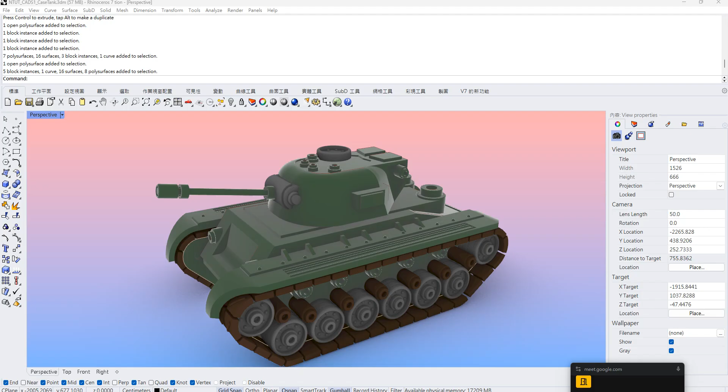Alright, so let's get started with the tutorial for today. Last week I hope you guys have already finished this part - the tab of the tank, and also the armor on the top. This part is basically nothing special, just follow what we've done before. We have already finished the shell, the armor, and then put the wheels on. Then you're done.

So today it's going to be a little bit intense. We are going to finish the cannon. I will probably simplify a bit about the cannon part, and we also have to finish the body of the tank right here.

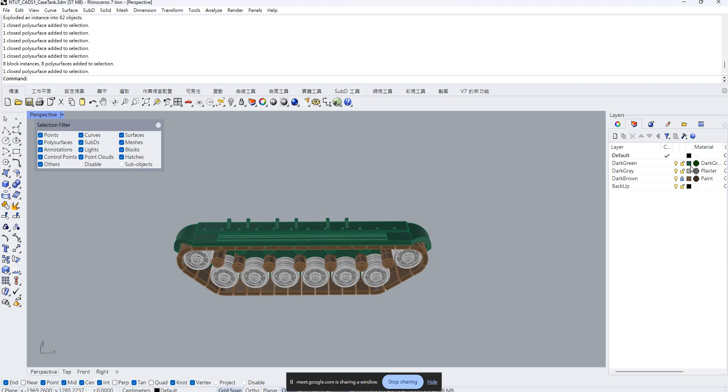Press Ctrl and G, or go to Edit to do the group. And for sure, again, we are going to make this one become a block. So type in B-L-O-C-K, block. Make this one become another block inside your model. So we can totally call this one ARM and tab. Okay, so here it is.

So the advantage of making this one is that once we change anything right here, the other side, the left side, will be changed as well. So if you are going to change the detail of your model in the following operation, it will be easier. You don't have to copy and mirror it again. All right, so that's the things.

Now let's take a look at the body of the tank. The body of the tank actually is pretty simple. Let's take a look.

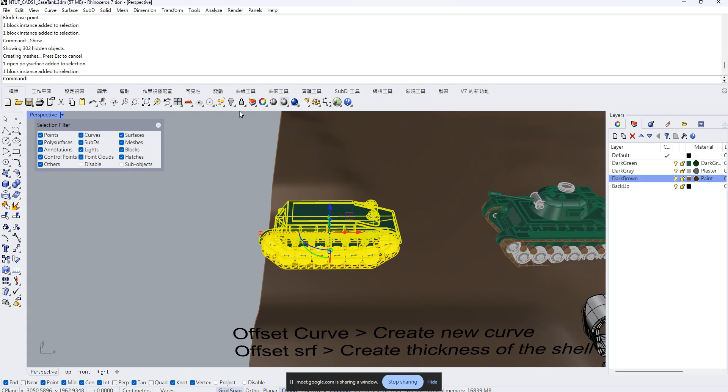As far as you can see, although it's not a regular primitive geometry, you can see that all these things are just like, I would say, very sharp and very regular geometry. There's no smooth corner or complicated geometry right here. Basically, for this one, it's just like regular simple geometry.

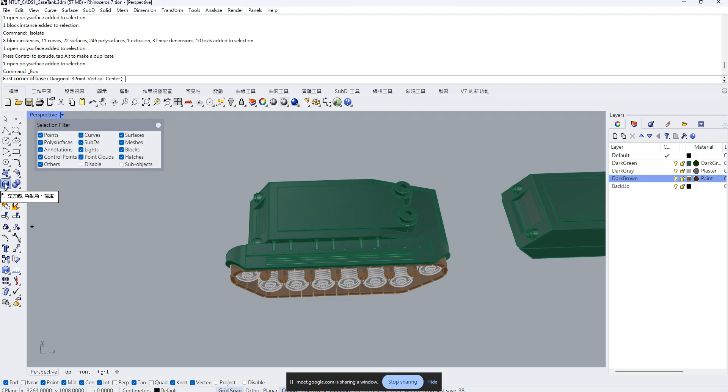So actually, we can start with a single cube. So that's using this one, the box. Just randomly draw, and you can assign the size of the body.

So probably for me, I will type in 600. Oh, 600 is too much. I type in 400. Okay. And for the width, I will type in probably 200. And for the height, I will set this one as 90. So this is the basic size for the tank.

And for sure, if you cannot follow the units or the number, the size of the tank just like mine, it is okay. Just draw a box.

So how can we make this one become something like this? First, we can just hold on your Shift and Control key and do the detail operation, move the edge of the model. That's the first one, we can do this.

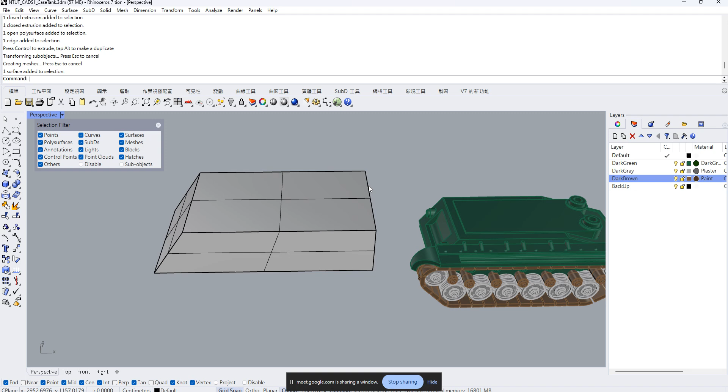So for example, let's drag and make this model look like that. So this is the first way, we can use this way to do the operation. But for this time, I won't do that. I will use another way to do that.

So let's go to the side view right here. So how can we make this one become something like this? For this time, I would like to use the trim command. So we can use polyline, we can draw a couple of polylines.

This one will be the first line, this one will be the second line. For this part, you don't need to assign a specific size or unit because after all, it's just about the form of the tank. So you can define it by yourself. And right here, I will do the same, just draw a line, and for this one as well.

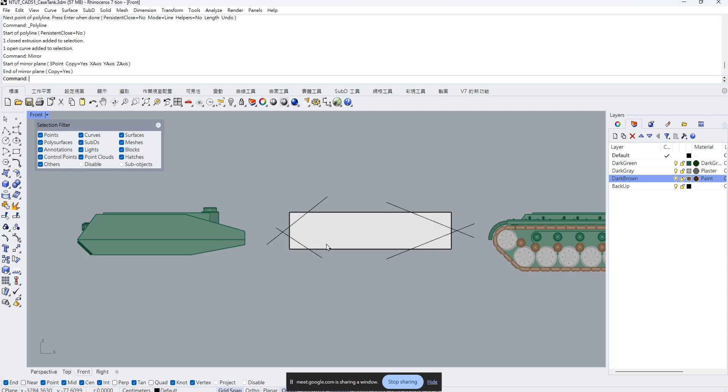Probably for that one, I will use mirror, because I want the upside and the bottom side to be the same. All right, so now we have that. I will move this one down.

So now we have already drawn the lines. Basically, the line is just like the guiding line right here. So how can we use this line and make this box become the form like this? Just use the trim and choose the line first. Basically, the line right here will be just like the knife for cutting your geometry. Then you can start to cut. Sorry, let's do that again.

Trim is right here. Using trim, choose the line first, press enter. Then you can start to cut. Let's just cut off the useless part.

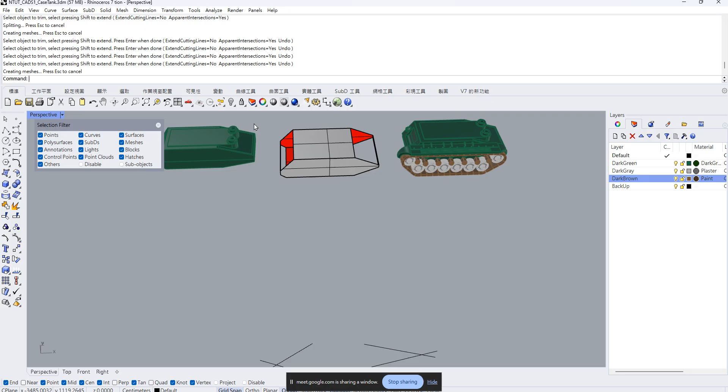Now let's go back to the perspective. You can see that this one becomes empty, but I don't want this one to be empty. So there's a command we can use. Wait a second, let me write down the note for you. So how can we make this one not an empty surface?

First, we can simply use loft. Second, we can use cap - not with E, just cap - which will be faster. Let's choose this one because right now all the open surfaces, all the open holes, are planar surfaces. So you can just select this model and type cap, C-A-P, on your command bar.

Once you do that, it will automatically fill the empty area. If you want to do it manually, you can use loft, L-O-F-T, choosing two different lines and fixing that. You have to align the curve and make sure it's on the right side. After that, you can Control J to join it. Both methods work, but cap will definitely be faster.

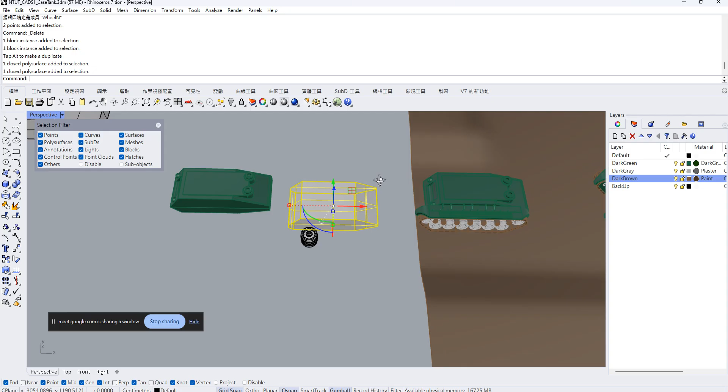For example, with this model I want to create a kind of base for the cannon. How can we do that? Actually very simple - let's just create another cube on top of the model. I'll click the box tool and just draw a box right here.

You can scroll down, and the size of the box doesn't matter - you can adjust that later. I'll draw a box like this and make sure to put it on the center of the mesh. Move this up a little bit, maybe around 5 centimeters. Now how about the border?

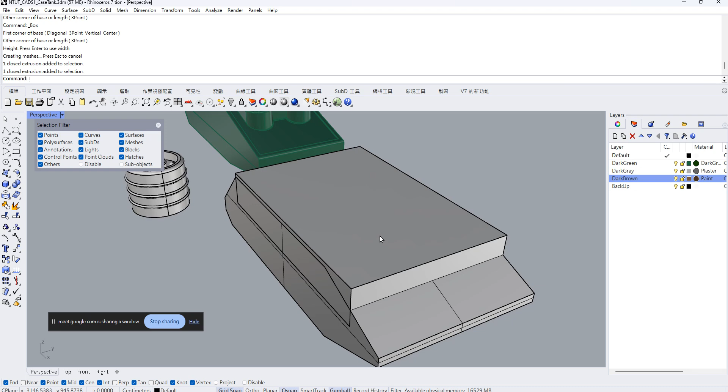For the border, I want there to be a gap on the side. I'll click this one and move it in, maybe 15, and this one negative 15, and so on. Now we have these bases - the base for this part.

Now how about this? Basically, when I'm working on this kind of stuff, in order to save time and speed up the whole process, I prefer using a model we already have and modifying it into the tank detail. We already have the wheels, so I'll explode this one and extract it - I want to use the center of the wheel to create the detail right here.

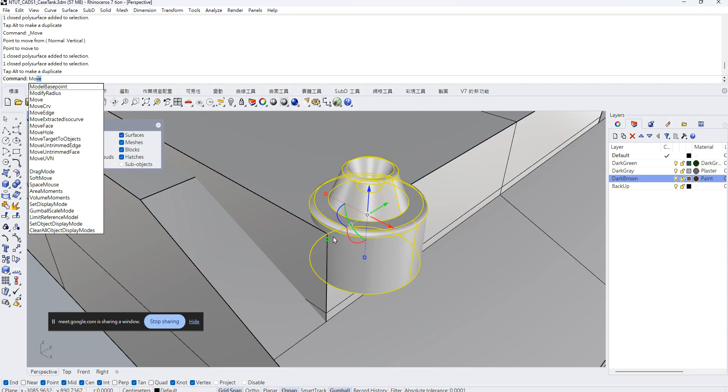Let's move this one to this side, using transform, move, and move this to the spot. In order to make sure this can perfectly fit your model, you can just use the move tool to position it to this side, and it will drop down.

Obviously the size isn't perfect, so we can drag this down and move it up a little bit. Now we have it. And if you think this is too small and want it bigger, let's just scale up this one and put it to the right side.

Okay, so that's it. That's all about how to make the detail of the tank.

For this part, I also want to have some gap, so I will move that again, probably 15 or so. So how can we make all these things become one object?

If you remember, I have to make this one become a solid object first. All right, so first let's mirror this one because it's going to be a symmetry model. So how can we make this an integrated model, one single model?

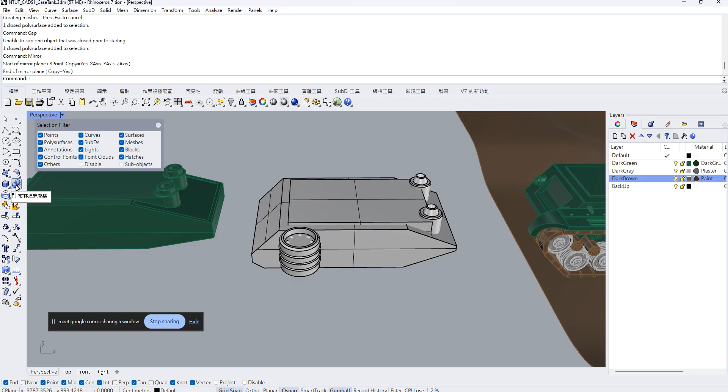Just like before, let's use Boolean union. Let's select all of them, choose Boolean union, and all these things will become one. You can see the wireframe, the ISO curve has changed, and the detail has been added.

So that's it. For the front part and for the head, like the headlight of the car, we can use the same method. So I will copy another wheel here.

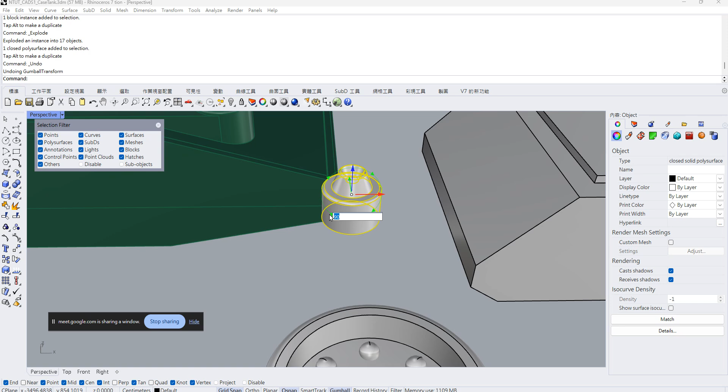Explode it, because I only need the center part. Rotate this one 90 degrees, and make this one longer. Pull this model to here.

And again, mirror it. Choose everything, Boolean unions, all right.

So that's it. That's about making the detail on the car, on the tank body. I will stop right here.

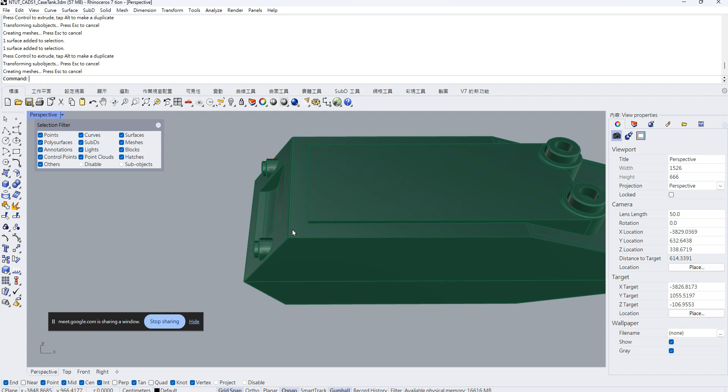So for the tank's body, it's pretty much done, but there's still some detail we can keep improving. For example, the shallow part on the front side, or maybe we can add some detail on the back side to make sure it looks detailed enough. So how can we make this one, how can we make this part?

Actually very simple. When working on this kind of form manipulation, the first thing we can do for sure is use the selection filter to add the sub-object under the model.

That's the first one, so you can select the curve, vertex, and change the shape right here. That's the first thing we can do.

And second, for sure, we can use the object, the model, or the curve to do cutting, trimming, splitting, etc. Right now we're going to use a box to cut off from the model. So let's choose the box right here.

Draw a box. Let's assume this one. Okay, make this one smaller.

So let's choose in the model. Hold on your shift key, scale down this one to probably 0.8 or even smaller. All right.

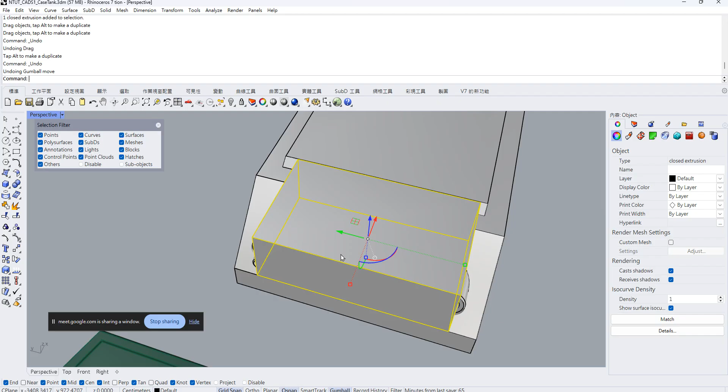Oh sorry, let's do it again. All right, so make this one smaller, make sure it won't intersect with our headlight. Put this one here. So basically make sure all these models have been completely intersected with each other.

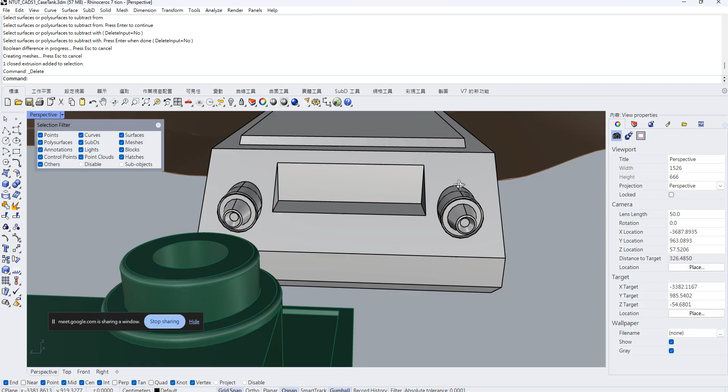Next, the thing we can do is use Boolean difference. Choose the model, press enter. Choose the box, second. Now you can see it successfully helped us create a shallow part on the body of the tank.

So for sure, you still can do manipulation on this one. You can change it and also edit the curve yourself, but you can see right here it's a curve, actually a surface.

So how can we do that? Very simple actually, let's use fillet right here. Click fillet, choose surface one, choose surface two, and you get that. Let's just enlarge the size.

Probably I'll make this one become, wait a second, let's do that again. Okay, let's do that again.

So let's use Boolean difference. Choose the model first, choose the box second. So it will help us cut out the front of the model.

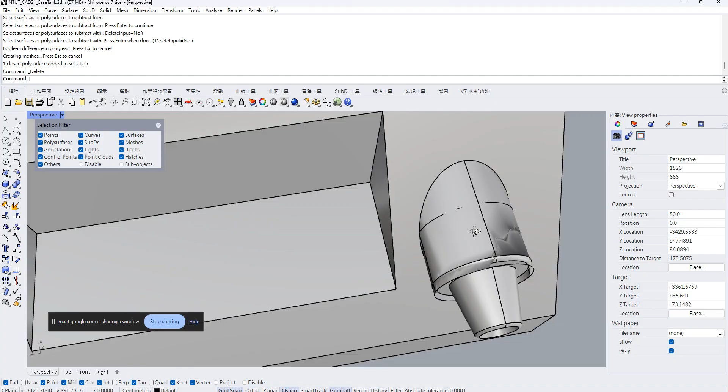You can see right here there's something weird, a color shows up. Usually these kinds of things happen because of a number error. We can fix that later, but anyway let's keep moving forward.

Let's use fillet, choose this one. I want to make this one become probably 30. And choose surface one, surface two, and we can get that one. Right, so now we have it.

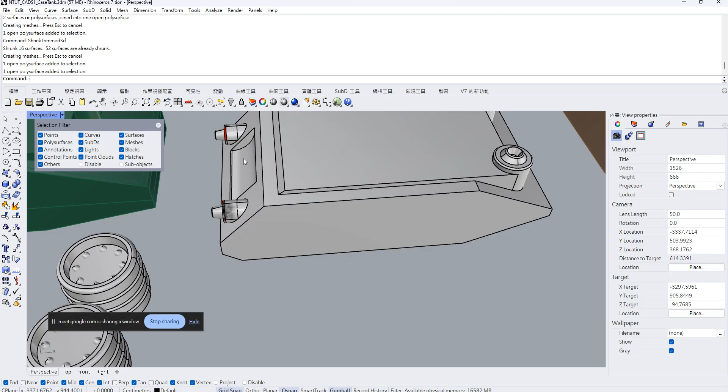So that's it, that's about how to make the detail. Once we finish this part, the front side detail, then we can start to make the tape combine with our body.

Let's move the tape to here. If you want to make sure these two things can be perfectly assembled, usually I prefer you guys using this command to help you measure the size of the model so that you can have a reference point and use that to combine with the target model. So let's take a look.

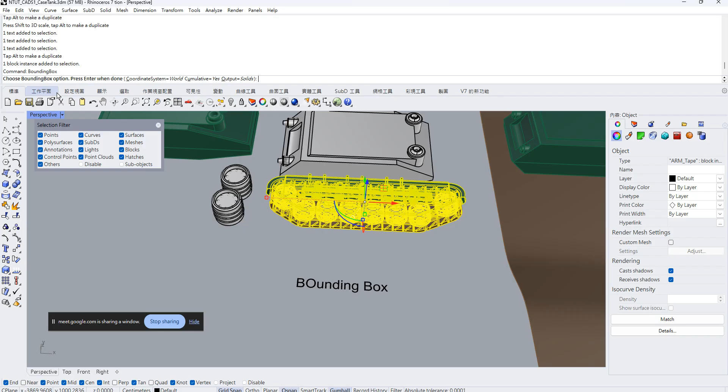So how can we have a reference point and also a reference size of the target model? I will use this one, bounding box. This is the command for measuring the size of the model. Let's click this one and type in bounding box. If you type the first three characters, the rest will show up.

Let's just click enter and it will help you create a box outside of your model, so that we can use this as a reference using the move tool. Move this one to the side, and also select your model as well. Move the model to here. Now they perfectly attach, but I have to insert them a little bit more, probably to here. For this part, it doesn't have to be very precise, let's just put them on the side approximately.

And the other side, let's just use mirror. Go to transform, using mirror, and mirror it to the other side. So basically, the body of the tank has pretty much been done.

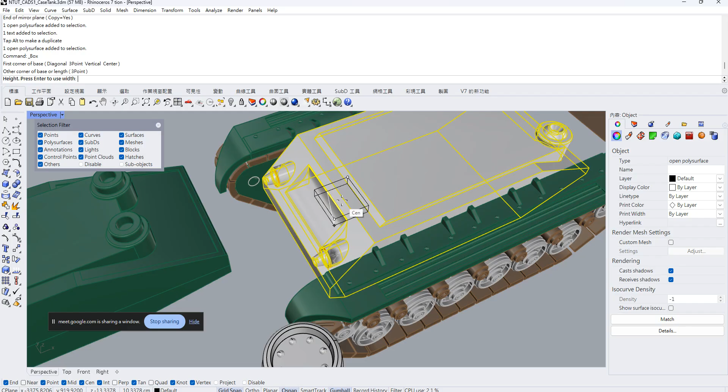Okay, so that's it. Let me repeat the operation. First thing, using the box to cut out from the model. Let's do it again, probably we can do the same thing on the back side. Box. Move them to here, move this one down. Scale down.

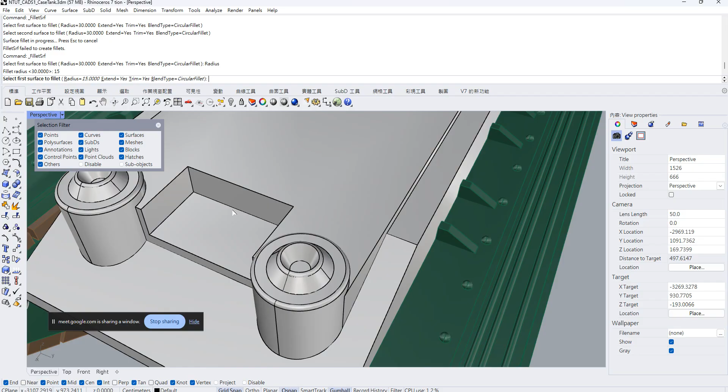And using Boolean difference, model first, box second, so now we cut out from the model. And then how about making this one become a surface? Very simple, using fillet, choosing the first surface, second surface. If this one is too large, we have to reduce the number of the radius. Okay, so now we have it. Once you finish, don't forget to join them.

So for the rest of the part, just move them to here, move the tape to here, assemble them together. That's the whole thing about the tank's body and also the tape. I will stop right here and give you some time to do it.

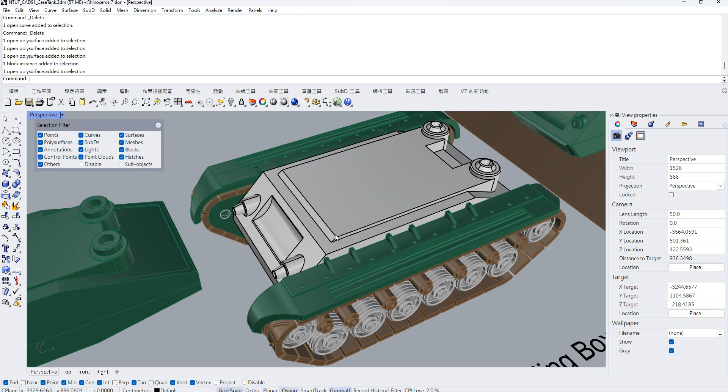So how can we assign color and texture on this model? Okay, how can we do that? Please take a look, inside Rhino, the way to assign color and material is to use layer to do that. So if you want to make this one become the green color, you have to put this model into a green layer. That's the idea.

Is there any questions on the back side of the classroom? No? Alright, let's keep moving forward.

So anyway, let's take a look. Let's go to the sidebar right here, the right sidebar. Let's choose layer, create a new layer. Let's call this one probably the armor. And how can we make this layer become the green color?

Very simple, there are two options we can do. First is this cube, this box is the color for the shading mode. So if we change the color right here, let's change this one to green. I'll do this one as well. Click OK, just using the color wheel to change the color. Click OK, so this layer will become green color.

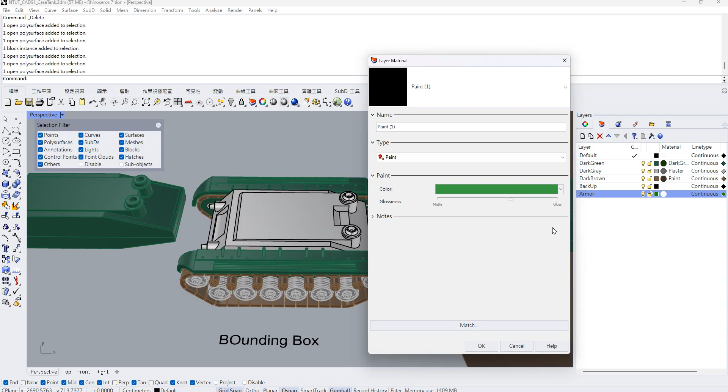For example, I want to use a paint color, coating color. You can choose the color right here. Maybe a deep darker green, click OK. The glossiness means the smoothness and the level of the polishing surface. If you don't want this to be super bright, you can reduce this number. Let's click OK.

So how can we make this model get assigned the color? We choose the model first, go to the layer, right click, change object layer. Now it will have that color.

This is just for shading mode. If you go to render mode, you can see the color has been changed as well. If you change this model to a different layer, the color will change as well. That's how we change the layer and change the color.

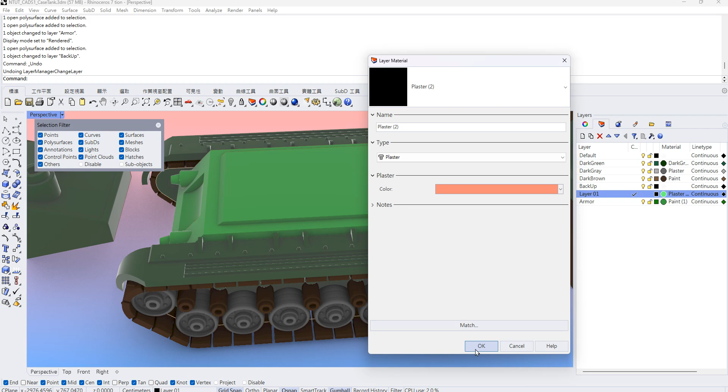Let's repeat: create a new layer, and change the color on the shading mode, change the color on the material. Maybe let's change this one to red so you can see more clearly. Click OK. Select the model, right click, change object layer. Now you can get that.

So that's it. The things I'm asking you to do: give me a model and also three screenshots. Please remember this command. I don't want you using the default screenshot, I want you using the command inside Rhinoceros.

Please use the inner command of Rhinoceros to do the screenshot. There is a command named capture to file. Let's assume this is the viewport you want to capture, this is the view you want to capture. Let's type in capture to file, view capture to file, this one.

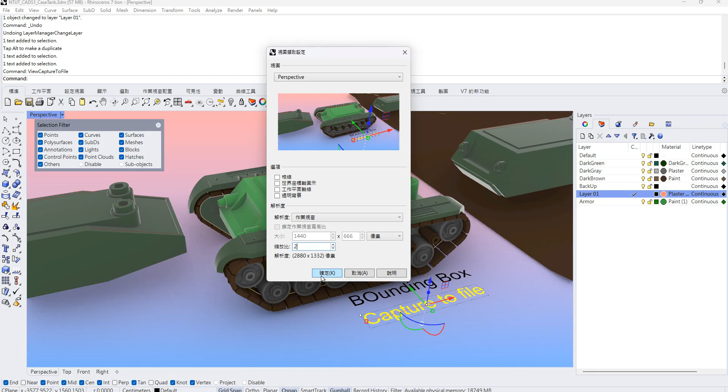It will show up this window, and you can set up the size of the resolution. If you're choosing 3 times bigger, it will create 3 times bigger size image than your screen. So usually I will set this as 2, it will be quite enough. Let's choose yes, and it will show this window where you can save your file.

Let's take a look. This is the screenshot you will get. The resolution will be higher and also very, very fast. Just remember this command, capture to file, use this way to capture the screenshot. Don't use print screen, because with print screen the resolution will be super low.

Here is about the setting of the texture. Just remember: create new layer, go to the sphere and also the box to change the color and the texture setting. Finally, choose the model, right click, change object layer, 改变物件图层, so you can move your model to the target layer and change the color as well. That's it, that's the last thing I have to teach you before we move into the rest.

All right, let's keep moving forward. In the last class, we already finished the body of the tank. So now the next thing we are going to do, wait a second, let me confirm I've shared the screen. Okay, the next thing we're going to do will be about the cannon.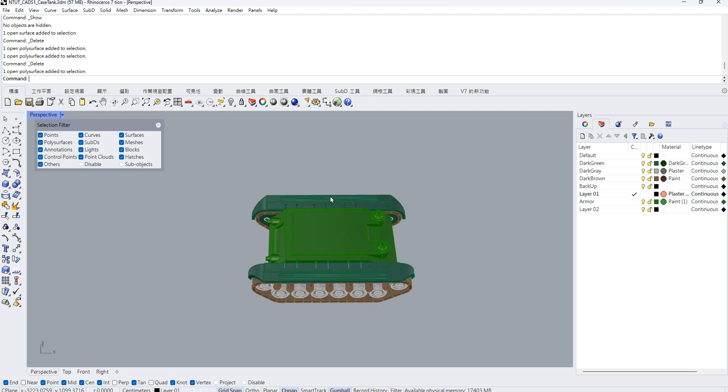The canal, I think this part will be very, very important in this class. Because if you want to become a product designer, or make a model for a car, vehicle, airplane, etc., you can follow this idea to do the model. So anyway, let's get started.

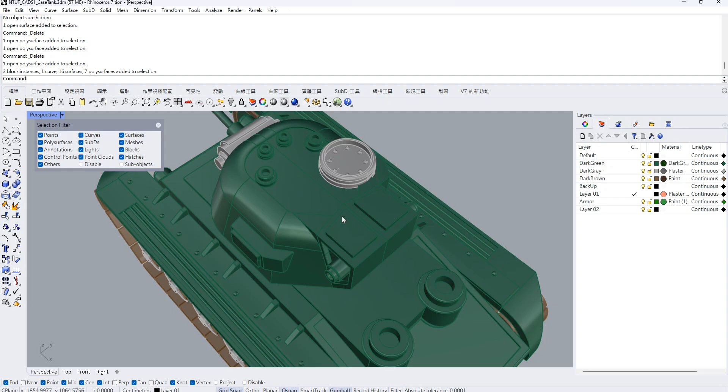Basically, when working on this kind of symmetry model, I suggest you cut the model into half so you only have to do one side. For the other side, just mirror it, it will be fine. For the canal part, although the reference I gave you is not a symmetry one, for the large proportion, they are still symmetry models. So this time, I will just do one side, and for the other side, we can mirror it.

But the hardest part will be here, this smooth transition. That will be a little bit hard at the very beginning, but please just follow my operation and try to do that. All right, anyway, let's get started. So let's copy this one to the side.

So how can we make this canal model? For that one, again, usually I prefer to start with simple primitive geometry.

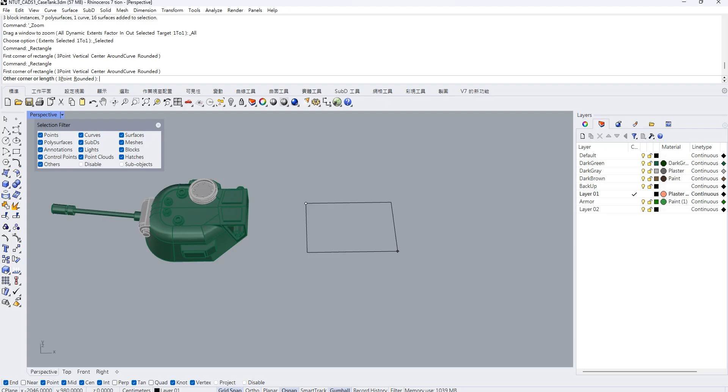So for this one, for example, the body of the canal, I will start with a rectangle. For now, I will do both sides because at the very beginning it will be easier for you guys to understand. So let's choose the rectangle tool and draw a rectangle, probably 120, something like that. So this is the model that I want to have, okay.

So how about the other side? Right now I'm working on the top drawing of the tank. I want to make this one a smooth corner, and this part can be a sharp corner. So how can we do that? We can use the fillet curve right here. We have similar options both in curve and surface. This time I want to use fillet curve.

And for the radius, 30 is fine. Let's choose 30. And for this part, I want this one to be a sharp corner. So let's simply choose chamfer, the second one. Go to the chamfer curve, click the little triangle, and choose the second one. This time again, I want to choose 30 by 30.

So now we have the basic one, the base drawing, the top drawing of the canal. How about the other side? Let's use a polyline to cut this one into half, using this polyline as the middle line, then choose trim to cut off. For the other side, right now we don't have to do that, but if you want to see the whole object, then you just have to mirror it to the other side.

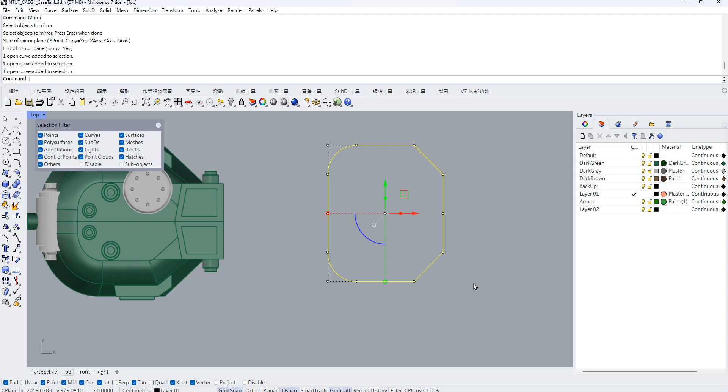Probably we can make this one longer so that the proportion will look better. Maybe just like this. So this is the top drawing for the model, all right? So let's give you some time, probably around 5 to 8 minutes, to finish the top drawing.

Just remember, we are working on the rectangle first, using the fillet curve to make this kind of round corner, then using chamfer to create this kind of sharp corner. Then just mirror it to the other side and you can get the top drawing. Let's give you around 5 minutes to do this operation, then we will keep moving forward.

Alright guys, let's keep moving forward.

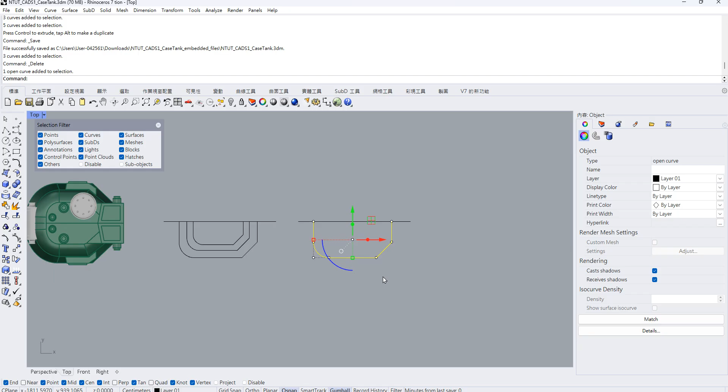So in the last operation, we already finished the top drawing of the tank canal. It looks like this: for the front part, we have a round corner, on the back side we have a sharp corner right here. So the next thing we are going to do is use this curve and gradually construct a 3D model of the canal. So how can we do that?

Basically, for this part, we are going to use the idea of sweep. This time we will use sweep 2. I would say the most important commands inside Rhinoceros are sweep 1 and sweep 2. Once you know these two commands, for most industrial models you are okay with that, whether it's a mouse, a laptop, a car, a vehicle, or even an airplane. If you know these two and can master them, I think most models you can handle. But organic models are still hard to do. For this one though, it is okay for you.

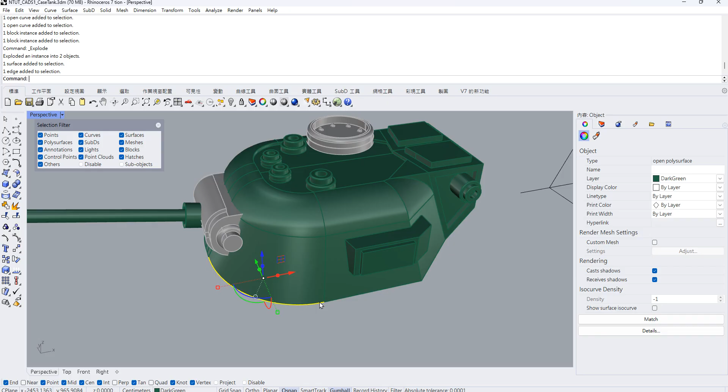All right, let's get started. So basically the idea will be like this. Now we have the bottom line, right? Here is the bottom curve, we have the bottom curve.

So the thing we are going to do is use the section curve, for example like these two. We are going to use the section curve, follow the bottom curve, the base curve, and create a surface for us. So that's what we are going to do. In order to do that, we need at least two rail curves, including the bottom one and also right here. Actually, for this time, I want to have three.

Then we can create a section curve to create the model. So the idea will be like this: here is the base curve, here is another 2 rail curve, and this one will be the section line. Once we set these up, we can ask Rhinoceros to use this section curve and follow the rail curve to create a surface. So that's the thing we're going to do. So how can we do that?

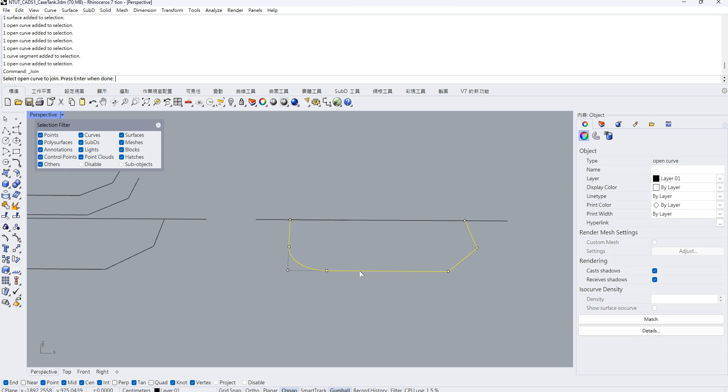First thing is I want to copy this one, here, that's the base curve. Let's just move this one up. Hold on your Alt key and use Gumball to copy. I want to copy this one probably around 40 centimeters high and scale this one down. Hold on your Shift key and you can scale down this one. Let's type in 0.8. Make this one 0.8, size bigger. So now we have the second curve.

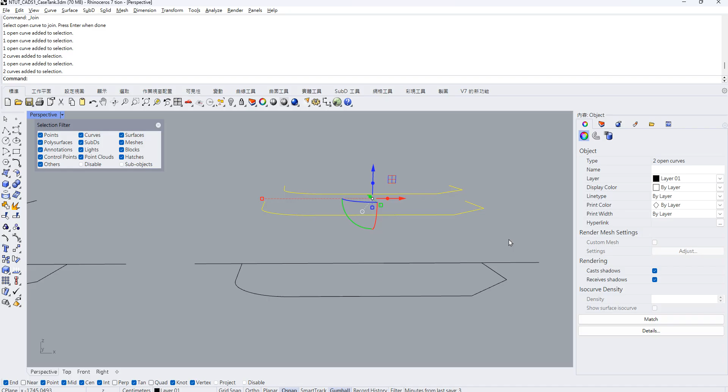How about the last one? I want to move this one up again, probably around 10 centimeters, and scale down this one again 0.8 times bigger. So now I have 3 different curves.

So let's go to the top view. We have to make sure all of them are aligned in the center. So please turn on project mode, this will make it easier to do. Let's move the curve to the center mirror line. Let's use a mirror, move them to the center. Okay, so now we have 3 curves, all aligned about our rail curve.

Let's repeat that again. So basically, first thing, copy this one up, around 40, and scale down, 0.8. And let's do that again: copy for 10 centimeters and scale down again, 0.8. Finally, move all these curves to the center. This time you can turn on the project and move them to the center, just like this.

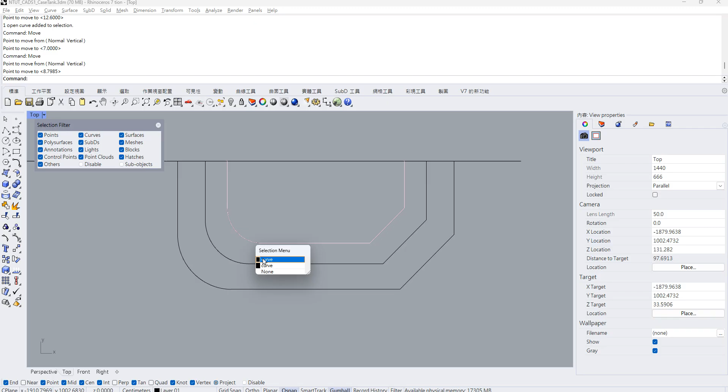Okay, just like this. All right, so now you can turn off the project. Actually, you still can turn on the project, up to you. Right now we still will be using the project. All right, I will stop right here and give you guys around 5 minutes to do this operation.

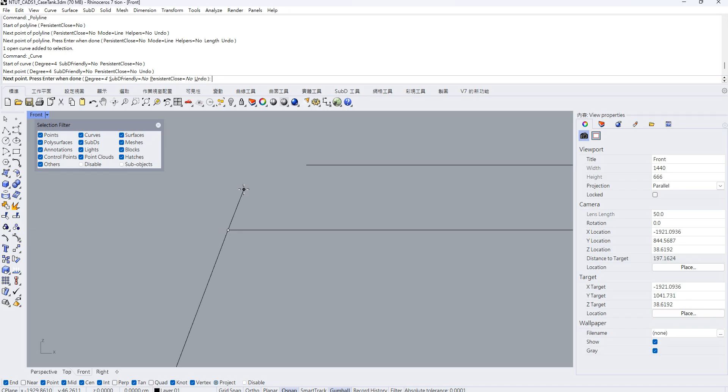We have to go to the side view. All right, let's go to the side view. And for this part, I would suggest you guys turn on the project. And just use the control point curve, this one, the second option here, control point curve, and start to draw, connecting them manually. But for sure, this is not precise at all. But how can we fix that? How can we make this one more precise?

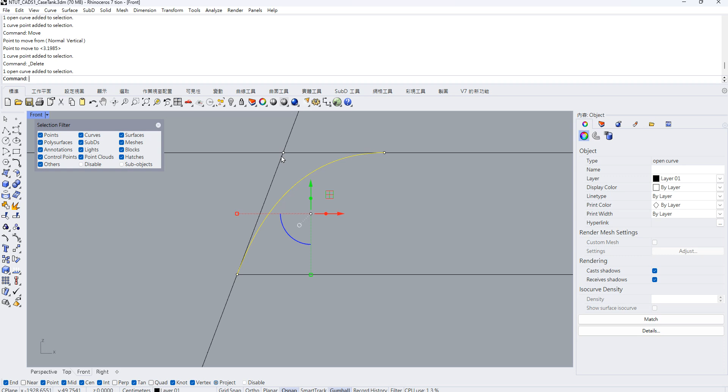Actually, we can try to do this. First thing is, follow the line right here and draw an extension guiding line. And for this one, let's do the same thing. Let's copy one more, type in copy one more, so make sure they can fit with each other. So for the rest of the part, actually we can use the control point, control vertex, to do the operation. Let's just use 3, it will be fine. So make sure the middle control point can perfectly locate it on the intersection point of these 2 extension lines, so that this one will be more precise. Okay, that's the thing.

So first things, let's repeat that again: draw a line between these 2 rails. Second thing, how can we do the curve between these 2? We can use the control point curve to do that. So let's just draw a line right here.

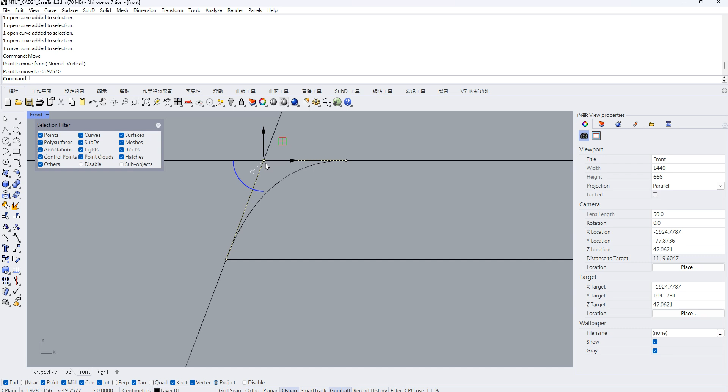In order to make this one perfectly fit with the line we already have, we need to do the extension line from this side and also that side. Finally, make sure these two things let the middle control vertex locate on the intersection point, so we can get what we want.

Okay, so that's it, that's how we can get it. Wait a second, I have to move this one here because right now we're working on the centimeter on the world center. So now that's about the section curve.

All right, let's finish the whole operation, then I'll give you some time to practice. So for the bottom side, very simple, let's just use surface sweep 2 rails.

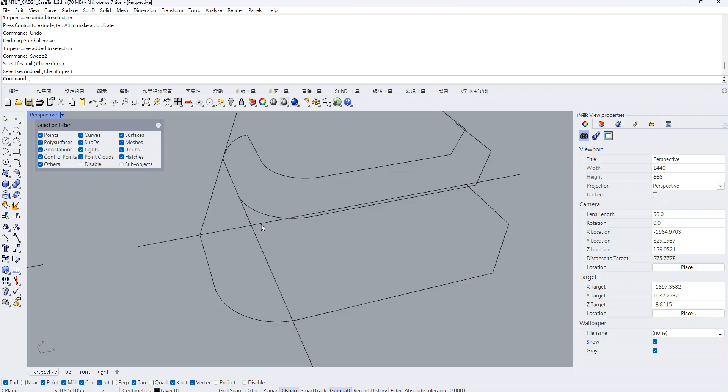Wait a second, I want to delete these now. Let's use sweep 2 rails. Let's go to surface, sweep 2 rails. Choosing curve 1, choosing curve 2, and choosing the section line.

So now we have this. If you don't like this kind of ISO curve, we can do it another way and make this more organized. Let's choose the rail line and explode it. Okay, let's explode it, then let's do that again.

Do the surface section by section. Choosing this, choosing the section rail line, choosing the section line, and this time do the same things.

Okay, so just like that.

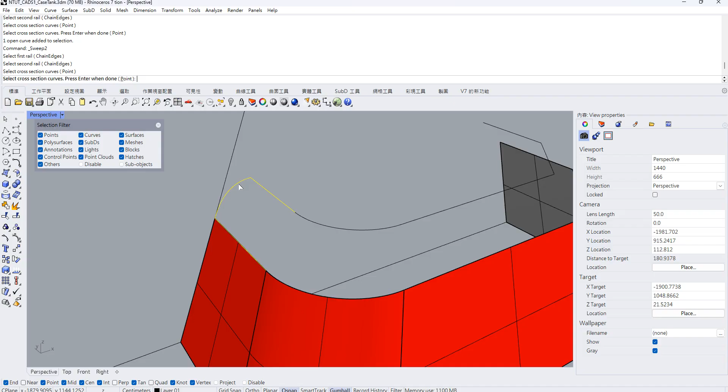And how about the upper part? Since we already have the section curve, it's very simple. Just choose sweep 2, choosing the curve first. I prefer to do that section by section, it will be more clean and more organized.

Okay, so that's it, so now we will have that. But this part looks pretty weird, but it's okay, I think we can still fix that later. But right now, let's just assume this one is finished. Let's give you some time to finish these operations. Alright guys, let's go back to your seats.

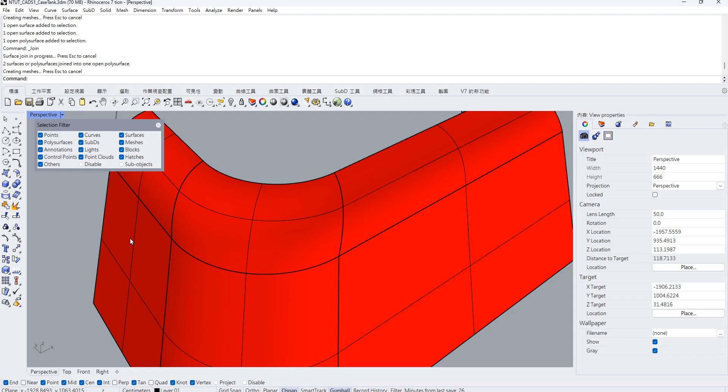Let's keep moving forward. So basically through the Sweep2 and the section line we have, we can create a surface like this. Don't forget to join them together, because before that it's supposed to be separated. So just select all of them, Ctrl and J, join them together. Edit, join. Alright, so you can see this part looks okay, but that part doesn't look right.

That's because for the radius right here, it doesn't follow the proportion to be scaled down. If you want to make sure everything can be super smooth and continuously linked, then we have to make sure the radius of the corner right here, and also here, and here, supposed to be the same.

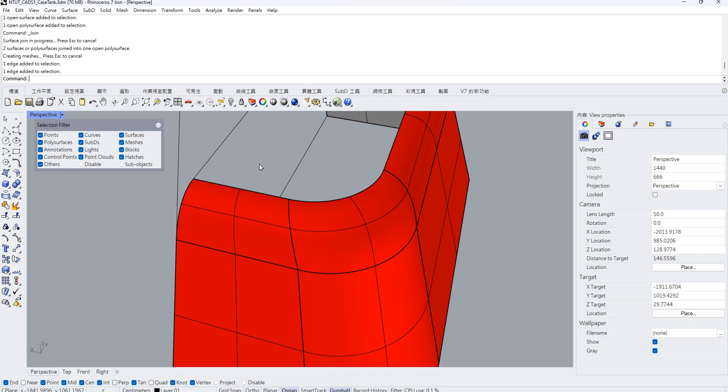So I think that will be a little bit tricky inside Rhino. Unlike Blender, for Blender it doesn't have to be that precise at all. For Rhino, if you want this to be smooth, moldable, and fabricated, it has to be precise. And once you do that, your product and prototype can look nice. But anyway, right now we're just working on the prototype, just working on practice, so it's okay.

All right, anyway, for the rest part, let's try to make this one become a solid model. So how can we fix the face right here? How can we fix the face right here? Wait a second, let me hide the rest of the part. So if you remember, there's a command that can help us fix, to create a planar surface right here.

Usually we use Cap, just like things we used before. But for this command, it only works for that kind of closure surface. So this time, rather than Cap, we are going to use planar surface, something we used before. Let's try using planar surface, type in planar surface on the command bar, and choose the curve right here, make sure it can be a loop and be a closure curve. All right.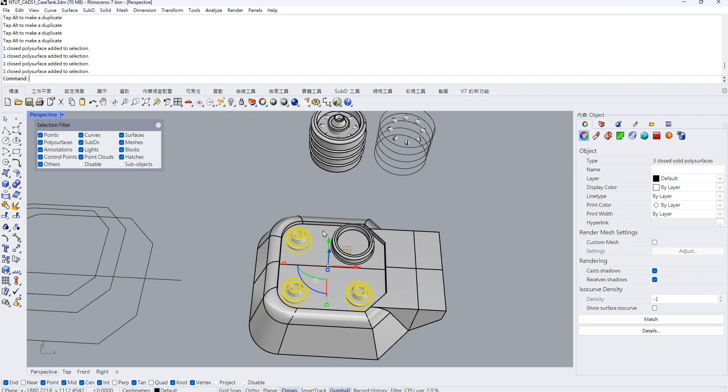All right, so now we have this. Let's join them together. Choose all of them and use Boolean union. So basically the major part of the tank is pretty much done. For the side right here, you can do that by yourself, okay?

Very simple, just create a cube, put it here, and then do some editing, some extrusion. So that's it. And mirror it to the other side.

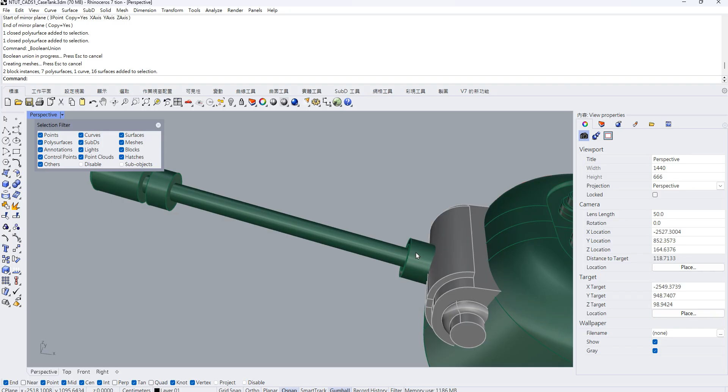Okay, so now we have this. How about the cannon? It looks complicated, right? But actually it's very simple. Let's just use a cylinder to do that.

So let's go here, choosing the second option, cylinder. Click this little triangle, go to choose cylinder. First thing, let's just drag a long cylinder, maybe like this. This is our cannon.

Make this one longer. So how can we create this kind of segment? Very simple. Let's copy—hold your shift key and also the alt key for copy, so that we can create one more segment.

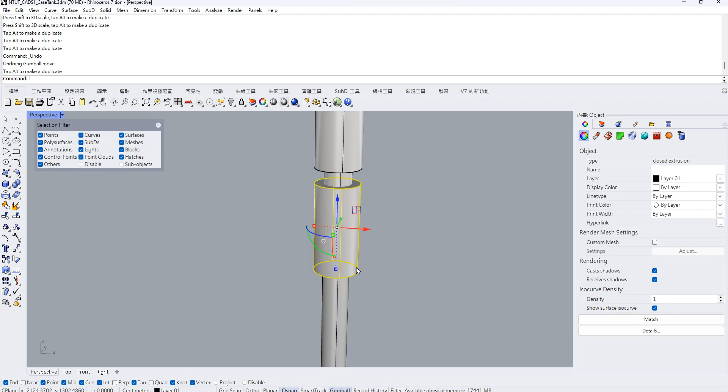And if you want more detail, then let's do this—create one more. Maybe two more. This one can be smaller again. And finally, join all of them together.

And for the join right here, just use the same idea, okay? Probably this one, we can also create one more join. This is for the join part. All right, finally let's use Boolean union to join all of them together. For the join part right here, I mean the intersection, the bridge between the cannon and the cannon base.

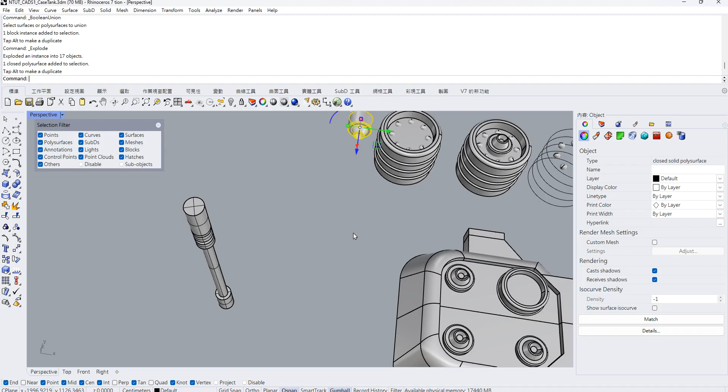That's using the wheel again—explode it, use this one, rotate 90 degrees, 90 degrees again, sorry. Let's go to the top view to make sure everything can be aligned, and pull them into the center.

Okay, mirror it to the other side and merge them together. Finally, let's put the model—probably we can make this one longer. It will look nicer.

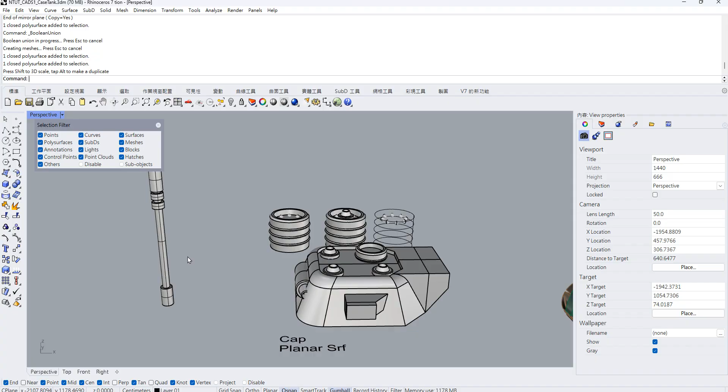Let's rotate your cannon and put this one to the right side. So that's it, okay? And for sure we have to make sure the cannon is located in the center, so just rotate a little bit to make sure this one is in the center.

Okay, so this is a cannon—we have already finished this one. Finally, let's put this model to the right layer and also put this model to the center of your base. If you think this one is too small, then just scale it up a little bit.

All right, so now we have this—this is the model that we have. Let's take a look at the final result. So the thing you have to give me is just the model like this, and also give me some screenshots. That's the whole thing for the midterm, all right—the model and also the screenshot.

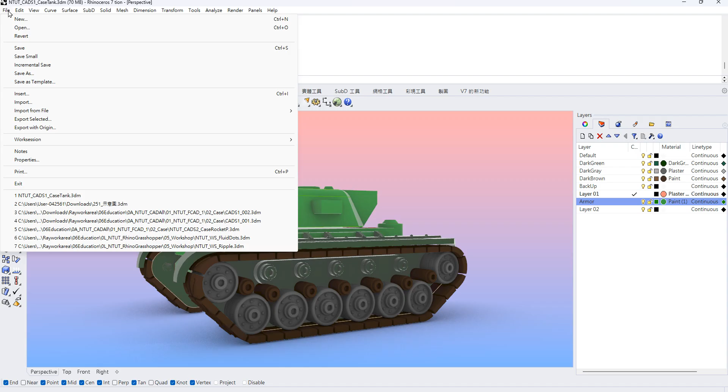And make sure to save your file in a Rhino 7 format. Okay, this part is very important—please take a look at how we can save your model in different formats, in different versions. Please go to File, Save As, and here you can choose the different versions, right? Rhino 2, Rhino 3, Rhino 4. So please save the file right here and save.